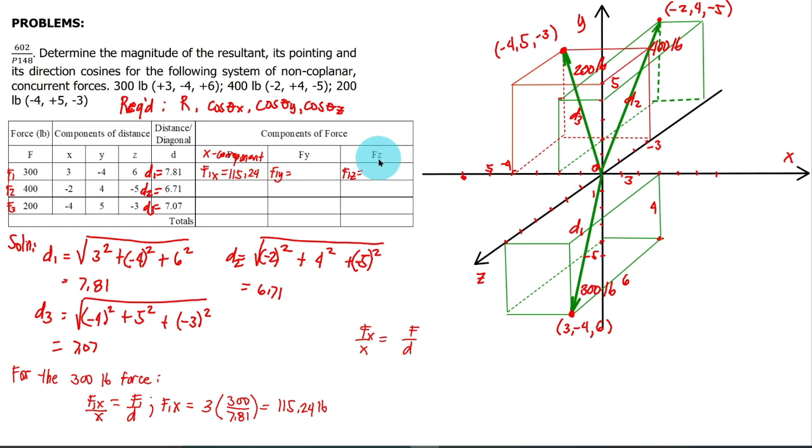So let us proceed to F1 sub y. So F1 sub y over your y equal to F1 over d. So y, take note, is negative. So let us include or consider also the negative sign of y for us to know the direction. So if it is negative, meaning it is pointing downward. So F1 sub y actually is here. Okay, so this is your F1 sub y.

So negative 4 multiplied by 300 over 7.81. So this is equal to 153.65. So this is downward. So pwede nyo rin hindi ilagay yung negative, pero make sure i-indicate nyo dito yung kanyang direction. Then next we have F1 sub z. So F1 sub z over your z again equal to F1 over d1.

So F1 sub z is equal to your z is 6 multiplied by again 300 over 7.81. So this is equal to 230.47. So in our figure, this is our F1 sub z, then this is your F1 sub x. Okay, so we can now solve the other components in the same method we apply here.

So let us proceed to the 400-pound force. So in the same method, dun sa previous solution natin, we use F1 over D1. So this time, we will use the 400 pounds and D2, which is equal to 6.71. So we can now solve for the X, Y, and Z components of the 400-pound force. F2 sub X here is equal to, so take note, our unit here for the force is in pound. So we can now also solve for the Y and Z components.

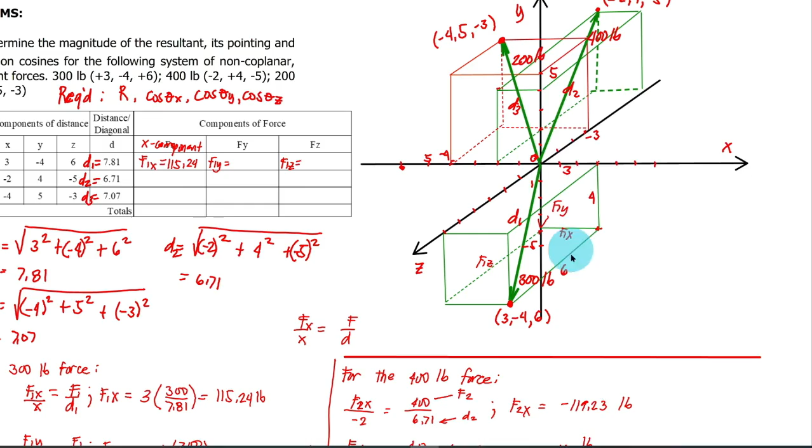So yung ating 400 pounds, kung makikita nyo dun sa ating figure, so ito naman yung force natin. So yung Fx, Fy, tsaka Fz. Yung Fx to the left, so ito yun, kaya negative. Okay? And then yung ating Fz sa palikod, so negative din siya. And negative 298.06. Then yung Fy, so pataas. So, that is 238.45. Actually, ito naman yon.

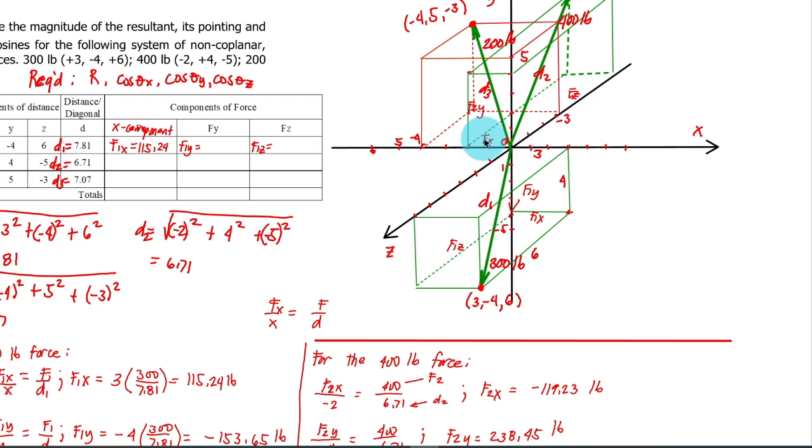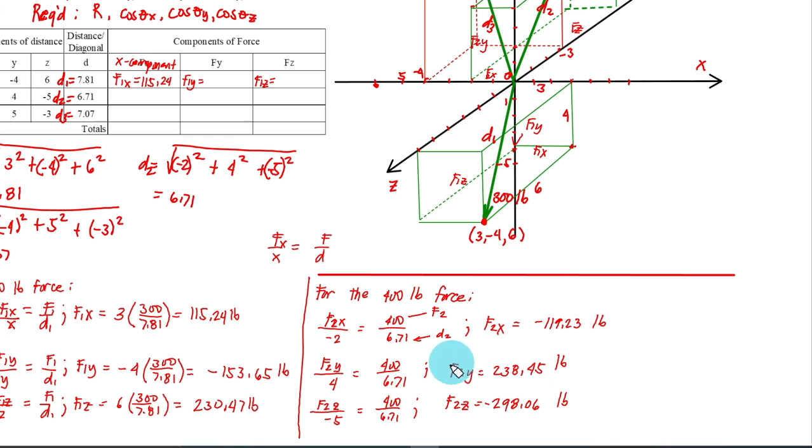Okay, so this is our F2 sub y. This is your Fx. And this is your F sub z. Or F2 sub z, F2 sub x. So, again, take note, it's okay to not write negative, but make sure to indicate its direction here. So, here are the components of the 400-pound force. So, next we have F3 or the 200-pound force.

So, for its x component, we have again F3 sub x over x for the 200-pound force is equal to F3 over your D3. So F3 sub x over x is negative 4, equal to F3 is 200 over your D3 is 7.07. So F3 sub x is equal to negative 113.15. Then for F3 sub y, so again, similar lang dito sa ating F3 sub x yung solution. The only difference is the denominator of the components.

So this is 5. Then for F3 sub z, this is negative 3. So let us change yung negative 4 to 5 so that we have your F3 sub y is 141.44. Then for F3 sub z, so negative 3 multiplied by 200 over 7.07. So that is equal to negative 84.87 pounds. So we are done with all of the components. So let us update our table.

So this is F3 sub x. So we have negative 113.15. Then F3 sub y is 141.44. This is negative 84.87. So yung unit dito sa component ay naka-pound. So this is F1 sub y, so negative 153.65.

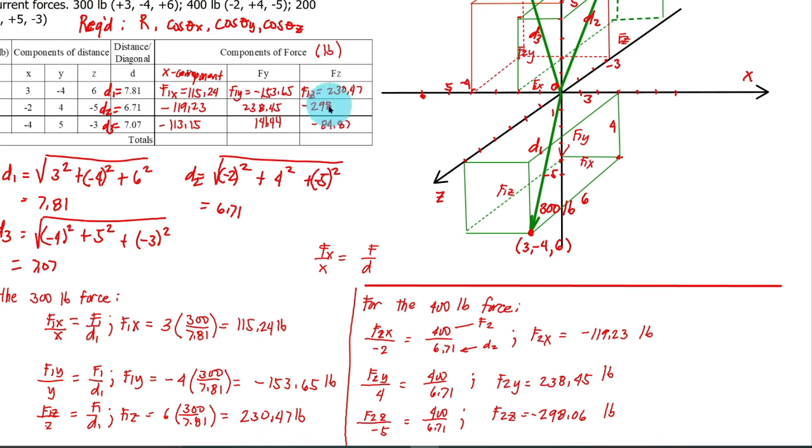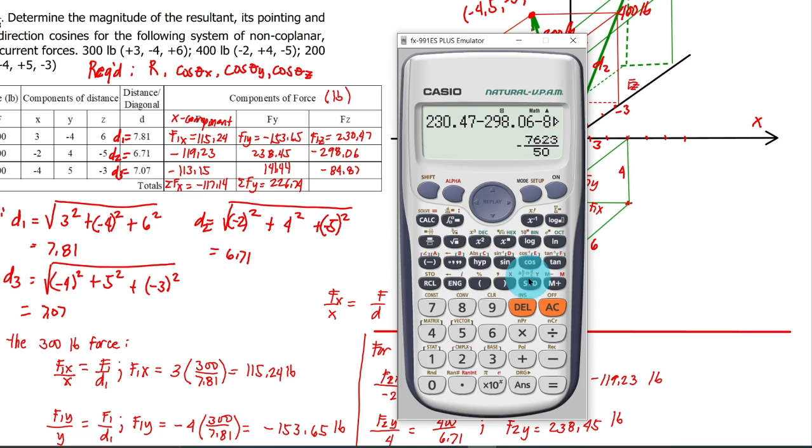So we can now solve for the summation of x, summation of y, and summation of z. So summation of Fx or forces along x. So this is negative 117.14. Then summation of forces along y, 226.74. Then for summation of forces along z-axis is negative 152.46. So we can now solve for its resultant or the resultant of this force system. Okay.

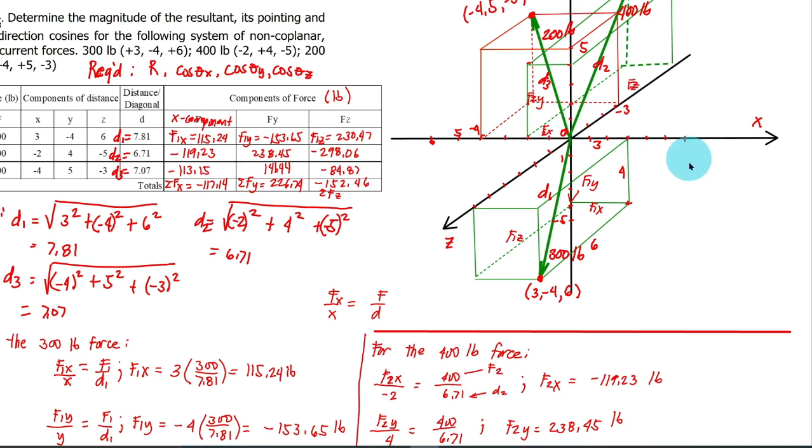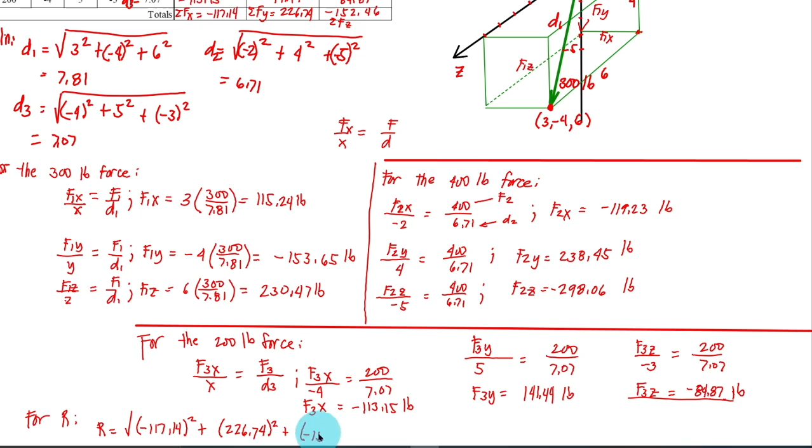So for the resultant, we can use the formula R is equal to square root of summation of forces along x, negative 117.14 squared, plus summation of forces along y or 226.74 squared, plus your negative 152.46 pound squared. So, ang shortcut dito sa calculator, pwedeng hindi na ilagay yung mga negative sign. Kasi ma-square din naman. So, magiging positive din yung sagot. Okay, so our resultant is 297.28.

Then, second required is the pointing of the resultant. So, we are done with the magnitude. So, the pointing can be shown by simply drawing the solved summation of forces along x, along y, and along z axis. So, negative 117.14 for summation of forces along x. So, meaning that is to the left. So, this is our summation of forces along x. Then, for summation of forces along y, that is positive. So, meaning that is upward. So, this is your summation of forces along y.

Then, negative 152.46. Since we have negative, therefore, meron tayong papalikod na summation of forces along z. Then, from that, we can draw the rectangular parallelepiped and then draw the diagonal, which will be our resultant. So, ito na yung kanyang pointing. And the last required is direction cosine. So, meaning that is simply cosine of the angle between the resultant and its component.

So, let us start with cosine of angle theta sub x or yung angle of inclination ng ating resultant with respect to the x component or x-axis. So, this is our theta sub x, which is equal to adjacent, summation of forces along x, over R. So, dito, for summation of forces along x, huwag na natin ilagay yung negative sign kasi cosine naman ang tinatanong.

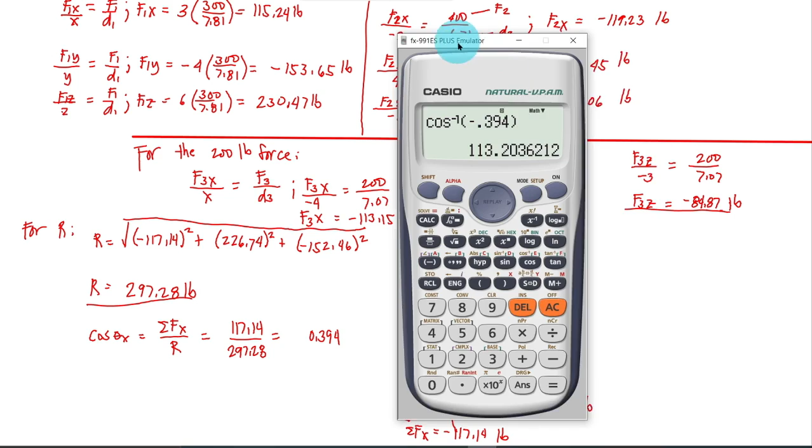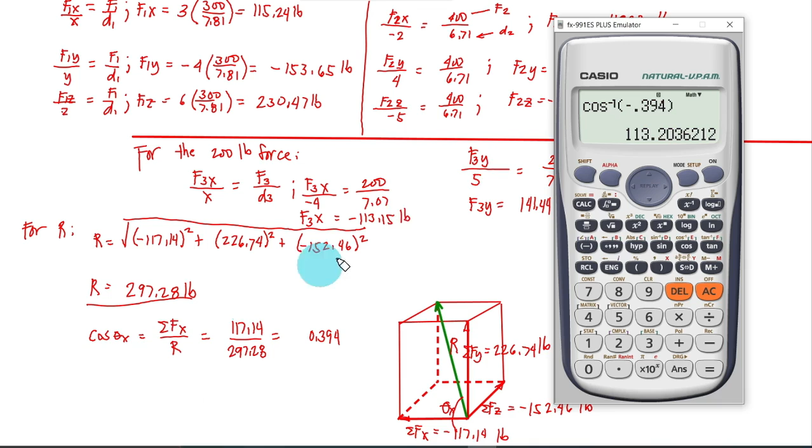And isa pa, if we solve the arc cosine of negative 0.394, we can solve 113.2 degrees, which is not realistic dito sa ating figure. Okay, so much better, wala na yung negative sign nito. Kasi kung halimbawa hanapin yung angle or yung theta sub x at mailagay natin yung negative, so mali na yon. So, ang ilalagay natin sa arc cosine kung sakaling hanapin yung theta sub x ay yung positive. So that we can solve the angle which is equal to 66.8 degrees.

So, although dito hindi naman hinahanap yung angle, yung cosine lang. Cosine ng mga angles. So, next we have cosine theta sub y. Okay, so this is our theta sub y, which is equal to summation of forces along y over R. So, this is equal to 0.763. Okay, so last, we have cosine of theta sub z equal to summation of forces along z.

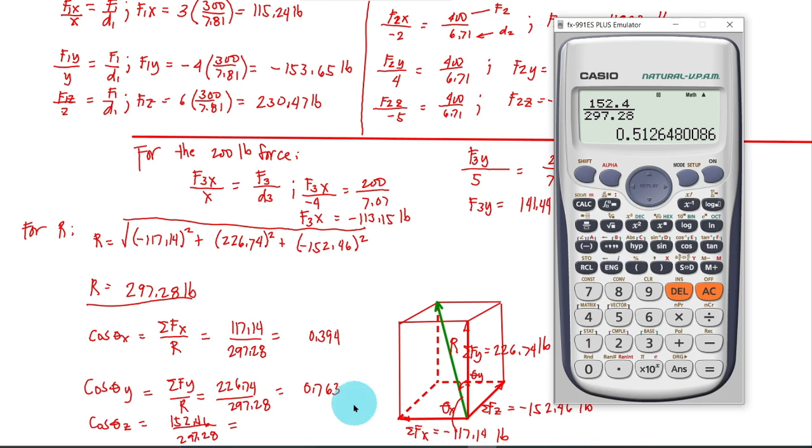So, we have 152.46 over our R, 297.28. So, this is equal to 0.513. So, you can write 3 or 2 or 4 decimal places. So, we are done with our problem. So, let us proceed to next problem.

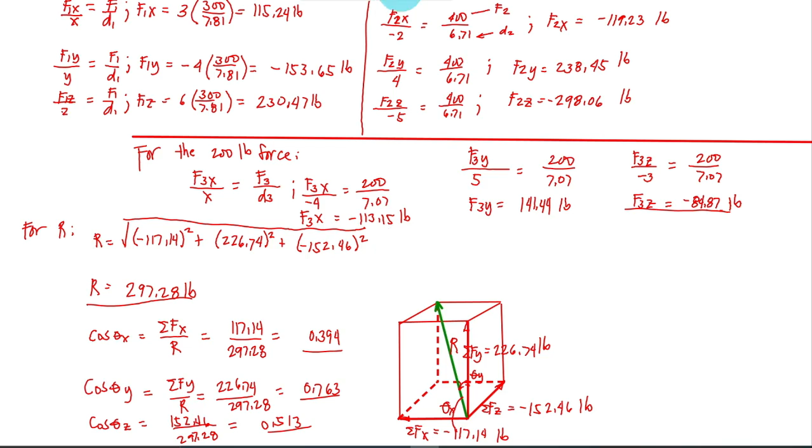A force of 100 pounds is directed from A towards B in the cube shown. So, this is point A. This is our point B. So, we have a force of 100 pounds. So, let us denote that as force F. Determine the moment of the force about each of the coordinate axes. So, meaning the moment with respect to the x-axis, the y, and with respect to the z-axis.

So, first of all, we need to, again, determine the dimension of the cube or rectangular parallelepiped based dun sa line of action or dun sa point A tsaka point B. So, let us solve for x distance from point A to point B. So, we have 1, 2, 3, 4 or simply 4 feet. Next, for y, so vertical distance. So, this is point A. So, this is point B. Meaning we have 1, 2, 3. So, 3 units for y.

And then last, we have z. So, from point A papalikod, so that is 1, 2, 3, 4. 4 feet. And then take note lang, kung ito yung ating force na 100 pounds, so yung kanyang component ay ito para sa Fy. And then for Fx is this one. Then lastly, we have Fz. So yung Fz ay palikod, yung Fx to the right, then Fy ay downward. So meaning, negative to, tapos yung F sub z ay negative din. Pero again, pwede nyo hindi isama yung sign, basta indicate lang yung direction later.

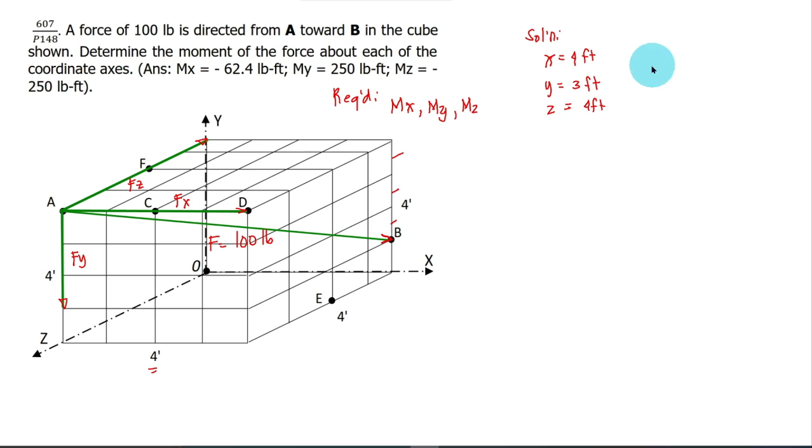Okay, so solution again for the components or D. Okay, so for D, so this is actually the square root of x squared plus y squared plus z squared. So these are the values of x, y, and z. So this is equal to square root of 41 or 6.4. So let us try naman yung other solution natin or yung D, gawin natin siya naka-square root. So square root of 41. So para mas exacto yung ating sagot.

So we can now solve for the components. Since hindi naman natin kayang isolve agad-agad yung moment ng force na to with respect dun sa mga axis, kaya ang solve natin, yung mga component. So kumbaga ganito yung concept na i-apply natin yung nasa isang illustrative problem natin. Okay, so kailangan na isolve yung mga components. Then yung ating line of sight, ilalagay natin dun sa mga axis.

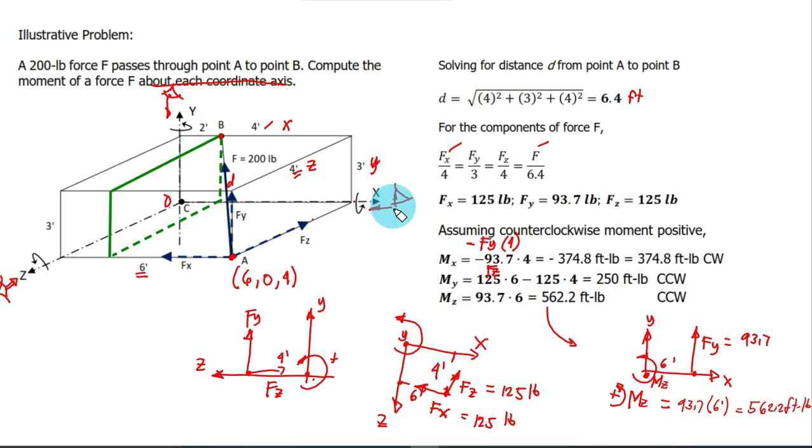So for Fx, so we have Fx over yung x dun sa ating rectangular parallelepiped. So this is equal to the force given over our D. So Fx over x is 4 equal to F is 100 pounds over D is square root of 41 feet. So the unit of these two is in feet. So therefore, makakancel lang. So we have Fx equal to 62.47. Kung mapapansin natin sa calculator, ginawa kong 400 kasi yun ay 4 times 100 lang. So mas madali yung aking computation. Instead, na-type ko pa yung 4 multiplied by 100. So this is 62.47.

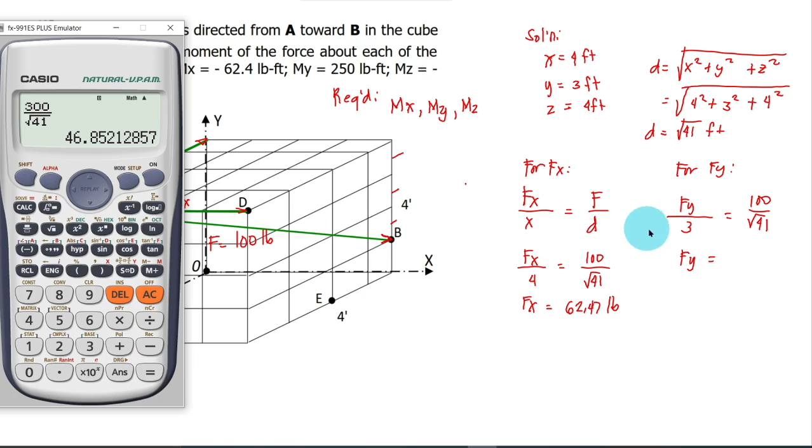Next, for Fy, so we have Fy over yung ating y ay 3 equal to again yung F over D, yung 100 over square root of 41. So Fy is equal to, so ngayon multiply naman natin yung 3 dun sa 100. So yun ay 300 or 46.85 pounds. Plus for F sub z, so Fz over yung distance along z is 4. So equal to again 100 over square root of 41.

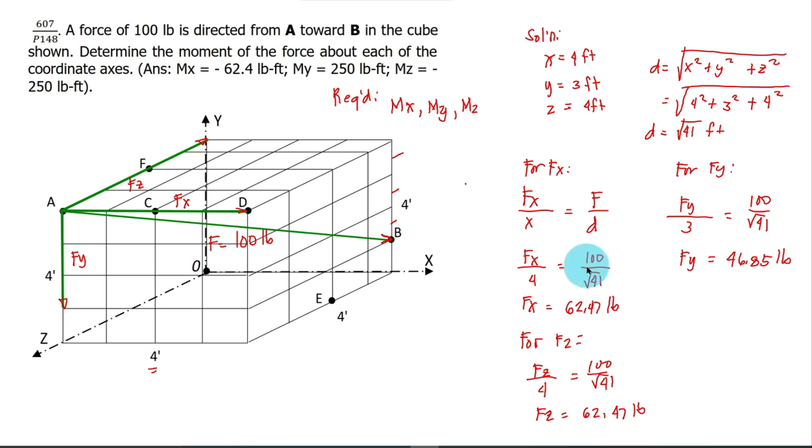So F sub z is equal to 62.47 pounds also. So pareho lang dito. So 100 over square root of 41. Now we can now solve for the moment. Okay, so let us write our solution here.